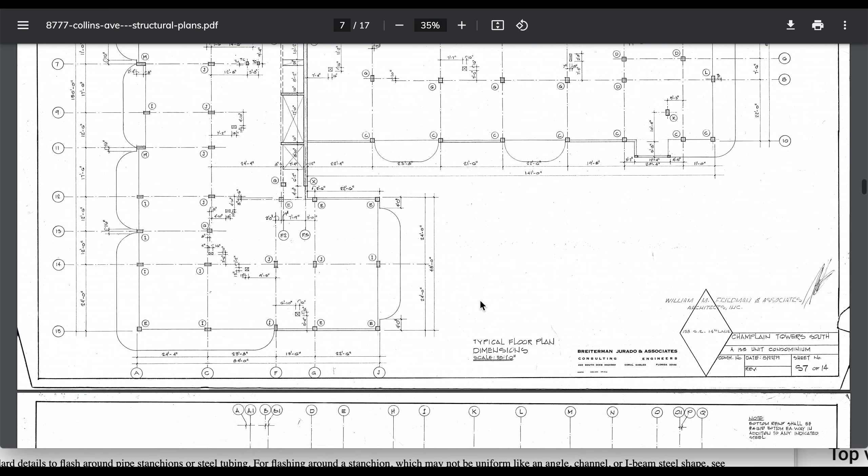There's a column, okay, floor plan. There's a column that supports the building. Basement, typical floor plan dimensions, looking for the garage.

And for people who say, oh you don't prepare and all that, this is the way I perform. I'm going to do what I used to do because some guy reminded me - why don't you give him your old link, your PayPal? I think, oh my gosh, I forgot I used to do that with the trolls. I used to say, here, hit this for me, and give them my link to my PayPal. That's how I used to handle the trolls.

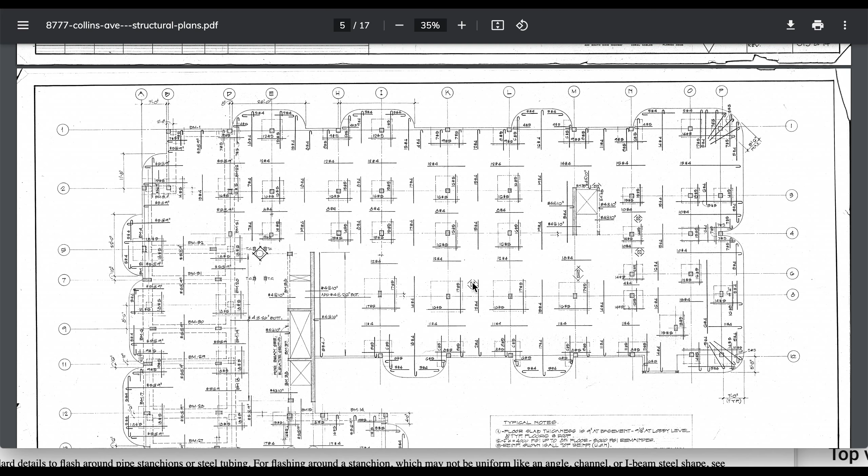There's the column there, the overlay. But so you'll see that again.

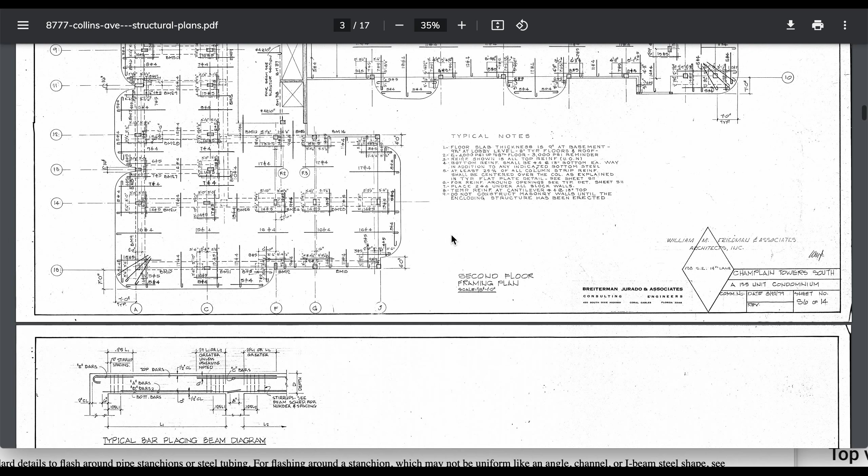All right, so it comes down here. Here's a column here. Now, is there another column there? This wrong floor—so everybody else says you're not prepared. This is the way I do it fluidly for the viewers. There's another column there. So if you return, how is the parking arranged?

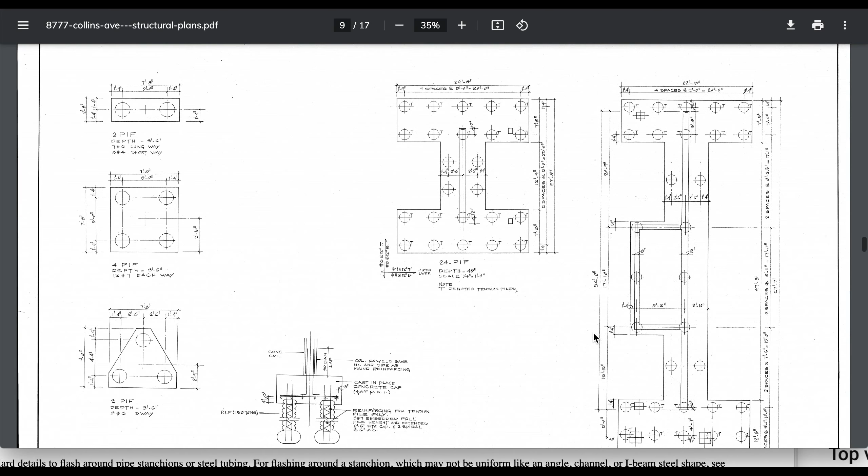Well, we had a parking arrangement. I'm in the structural plans, but we had a parking arrangement in here somewhere. I don't know if it was structural or not. Oh, I don't recall. Those are the piles.

No. They did extensive work—again, I'm repeating myself so you guys can remember that they did do extensive work on the structure in '02. There's the engineer. Somebody mentioned something about looking for the tile in the comments there.

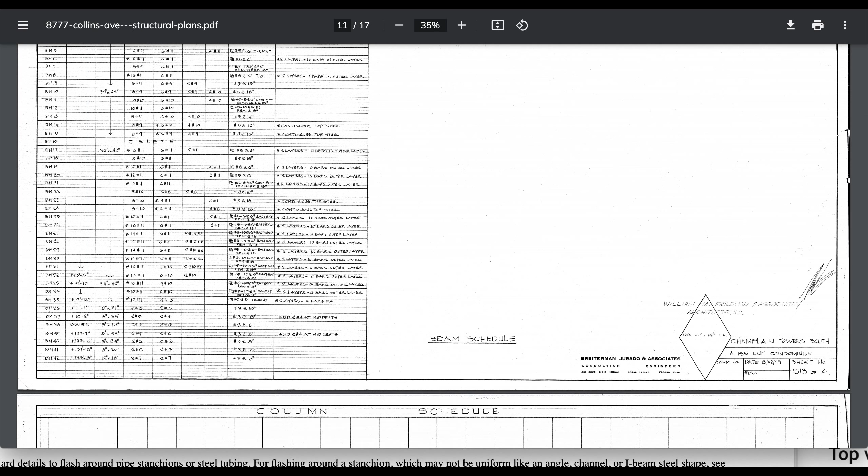AquaShield Surfside. AquaShield, I believe, is the contractor that did all that work under the supervision of that engineer and his company—their company. So these buildings, wrong side, brilliant.

The other side, I wanted the south side. Oh, this is the report. This is what this was—the presentation trying to show that this building caused this collapse. This building was completed in 2020. So this collapse took over a year for this building to collapse after the completion of this building.

Yet they started on the foundations a long time before that. Now I'm not discounting that. So in other words, their narrative is saying it was a 2-year delay before the collapse. If you use this narrative of Surfside—because I'm saying it's Surfside's narrative—this is published on their link.

And so if you use their narrative, it's called sour grapes. In psychology, it's called sour grapes, sweet lemons. So they're sorry that they gave this guy permission to restore that structure. At the same time they gave him permission to extend out to here. This was a street, I believe, right here at one point, and he was able to purchase the access rights to it to close it off—for some untold, some told, millions—and then he closed it off, and this is what got these people upset too.

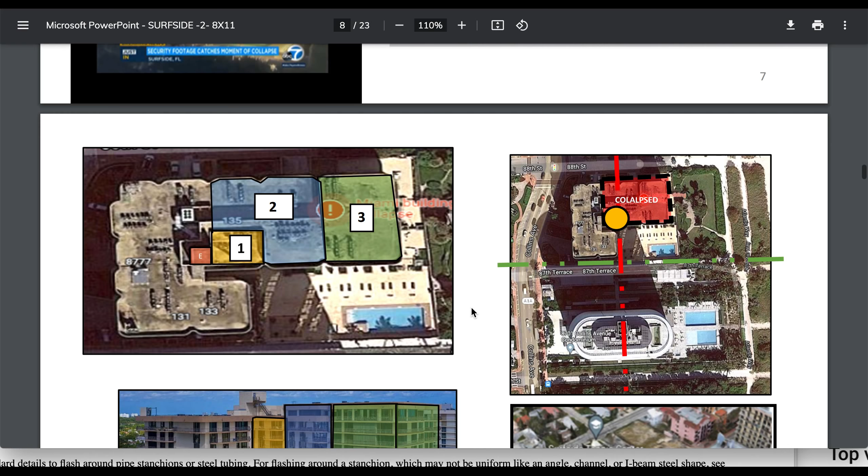They'll come out and say, well, now you need to do a traffic light, you're going to pay for it. You need to do a turnaround here. You need a shoulder here.

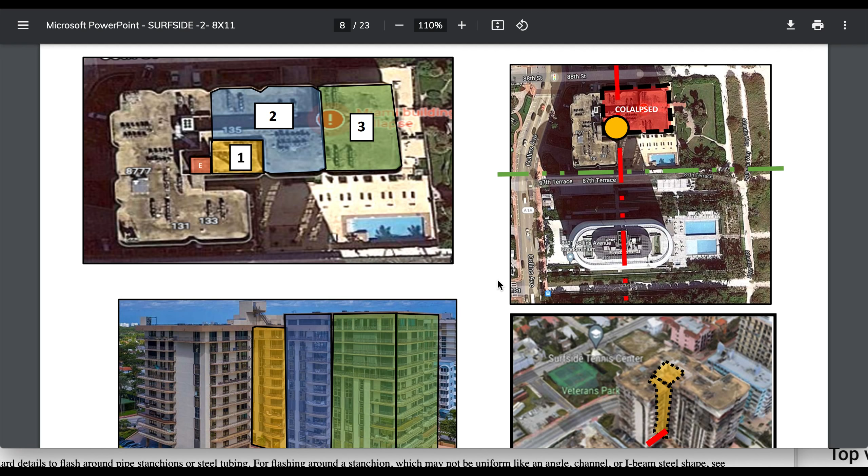It's typically done extortion style during construction—they wait till you get so committed to the job. They don't want to overwhelm you with fees ahead of time. They wait till you get committed, and then all of a sudden they get the bright idea of, oh yeah, this would be safer for the entrance, this would be safer for that. But most contractors and developers know that's going to happen now, so they already pre-plan for that and demand they nip it in the bud by saying, look, we're having water drainage with our own retention pond, and the overflow system would be this much.

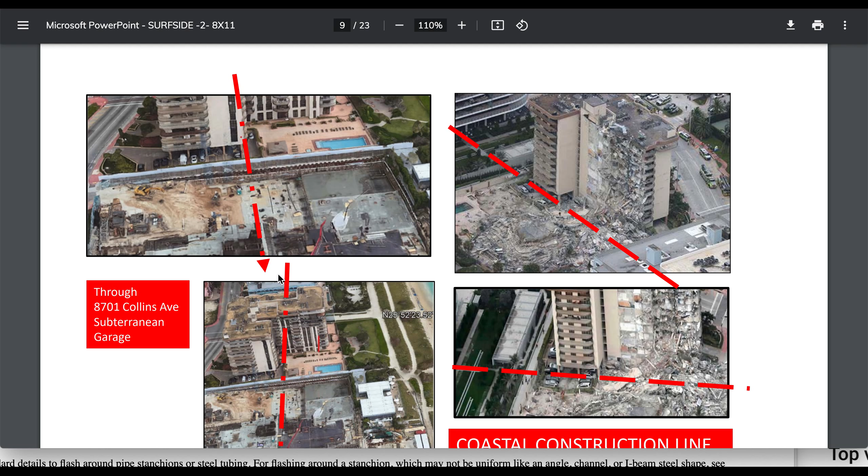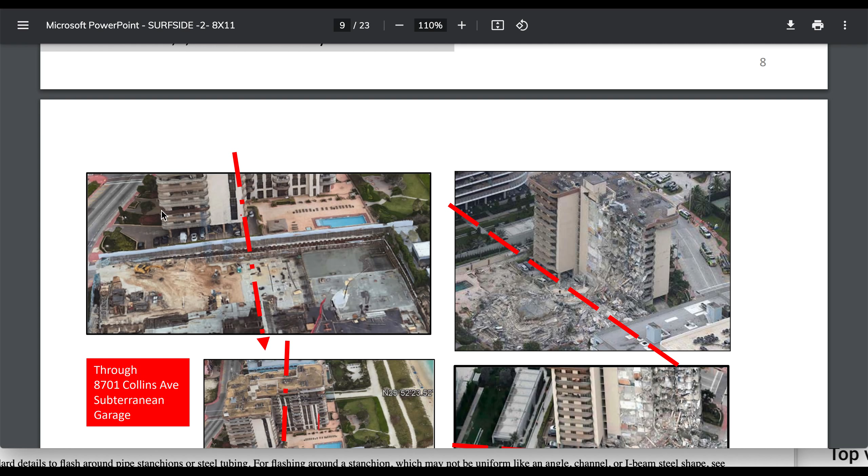They really calculate now, they try to save the cash. Someone got upset because they moved the arrow over here. Well, if you change your narrative, you guys wouldn't like it if I said look at this arrow, it hit the end of this building over here, that caused it to shake over there. You'd say that's lunacy, the arrow doesn't even go over there. Well, that's the same thing I say here.

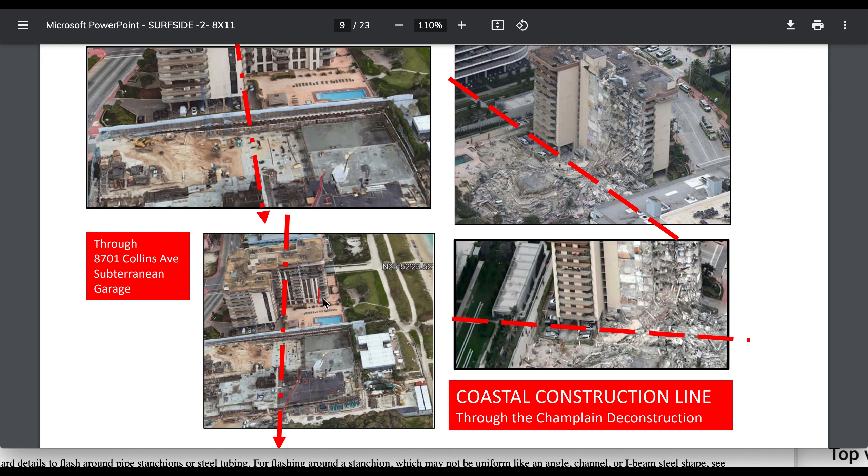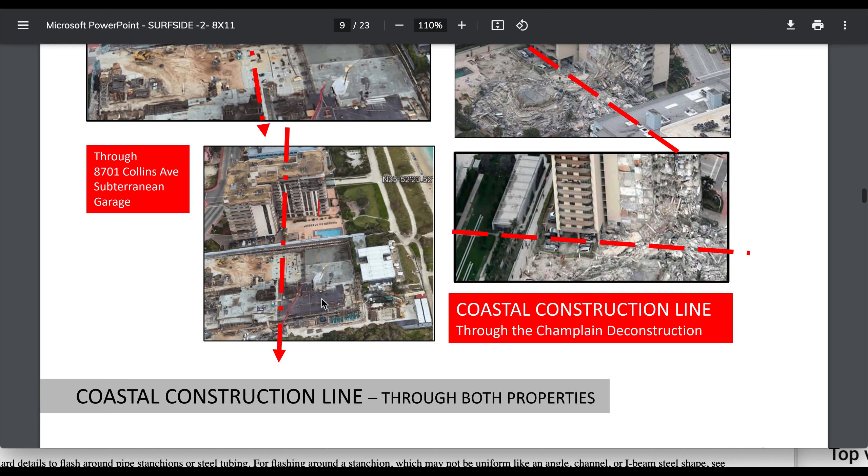So facts matter, right? With me, I always try to make every single piece of fact fit, including the two reports where the one lady changes her statement a little bit, and you can change your statement as you recall things. Let's go to your far right.

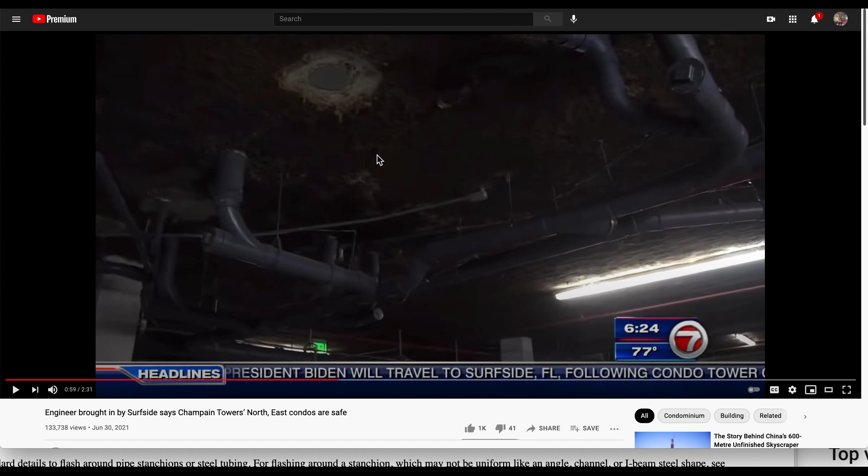We'll get to Phil Scott again, but let's go to the structure again. They're not the same, but you can see the scale of the garage shows the parking garage, no signs of cracking. Well, that's a hell of a statement - it says it shows no signs of cracking. You can say it shows no cracking, but to say it shows no signs of cracking is false.

No exposed rebar - I'm reading something. Hold on. Water, and the pump designed to pump water from the garage. Does that look like it's overflowing? I don't see it overflowing. I see a white wall with no stains on it. I see an electrical panel about that height. So people saying you got 4 foot of water, well, they would be shorting out their own damn panel.